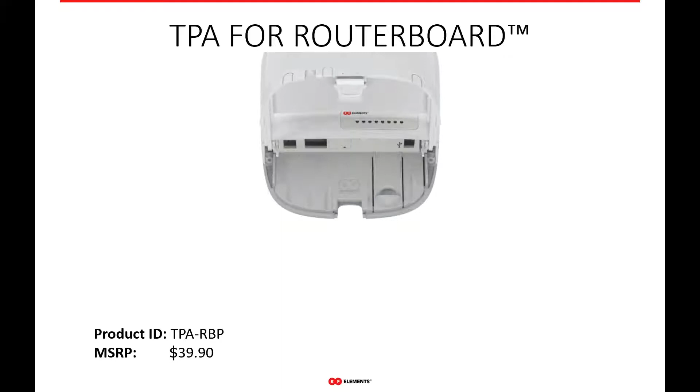So as where we left off on the TWISTPORT adapters for MikroTik. So the first adapter I believe you all saw was the TWISTPORT adapter plastic. Again, this is a plastic enclosure that allows you to put any of the 411, 711, 911, and the M11 series boards into the adapter and use them in our waveguide radios.

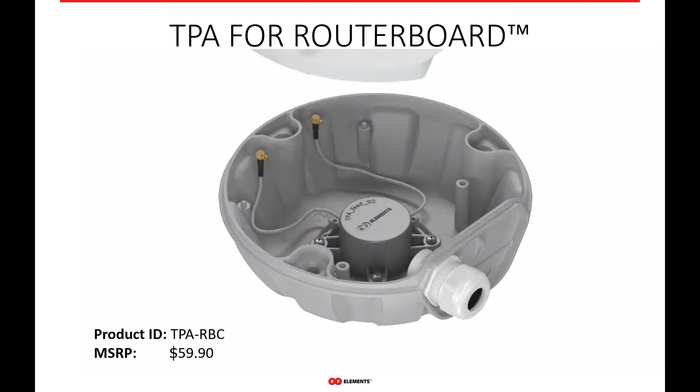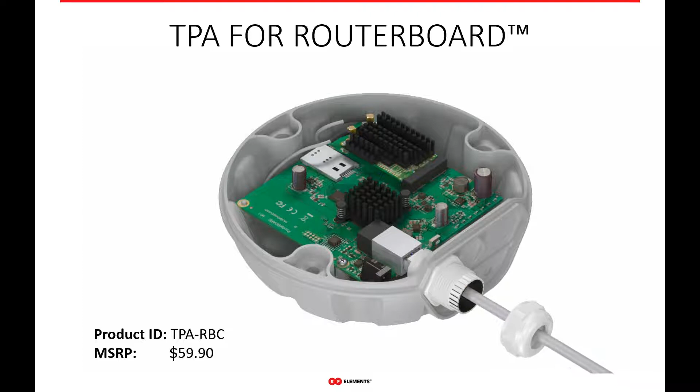The second adapter for ROUTERBOARD is our ROUTERBOARD cast. This is a full metal enclosure that gives you better EMI protection and is something probably better suited where you're operating in a more harsh environment. It has a full O-ring seal, and again, it's all metal enclosure. So again, this adapter works for all the same 911 type boards and M11 boards from MikroTik.

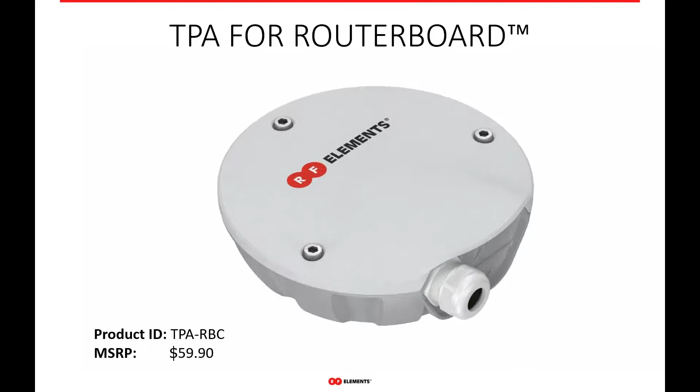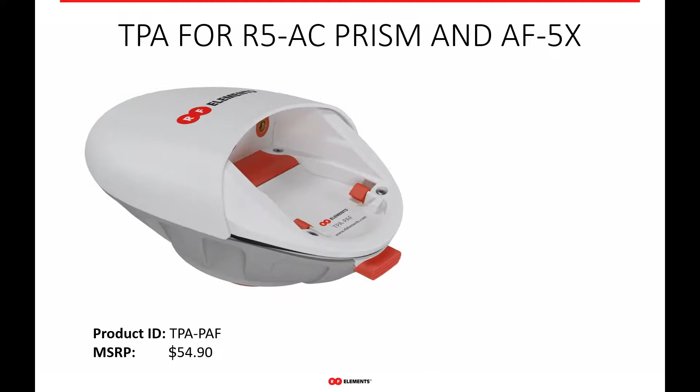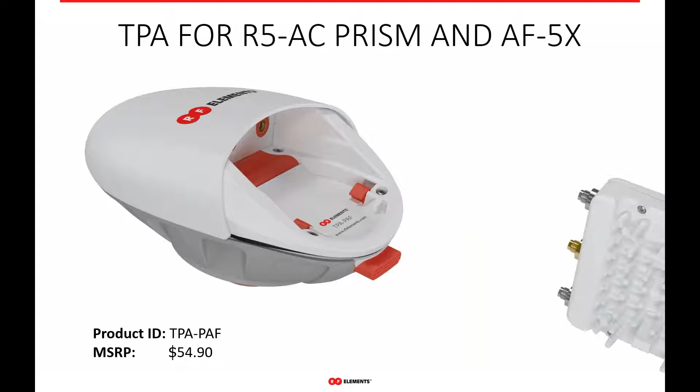If you're using the Rocket 5 Prism or the AirFiber 5X platform, this one adapter, the TWISTPORT adapter PAF, PAF stands for Prism AirFiber, again, will allow you to connect any of the Prism stations or the AirFibers with this one adapter into our TWISTPORT adapter.

This adapter has another new, very unique feature, and that's the GPS antenna integration. So if you lift the cover off of it, you have a very nice and safe place to put the GPS puck for the PRISM and the AirFiber radios. In a lot of installations and in a lot of different areas, birds and other things like to chew on the GPS cables when they're external. So this gives you a great place to hide it safely underneath the adapter, and therefore give you yet another great feature from RF Elements.

As far as compatibility goes, again, this one adapter works now for the new LTU Rocket. It works for the AirFiber 5X and the newer AirFiber 5X HD. It works for the original Rocket Prism 5AC and the Gen 2 Rocket 5AC. So again, one adapter for 5 different radio platforms.

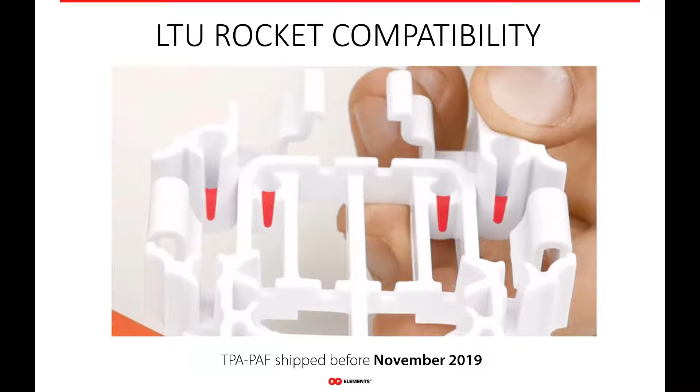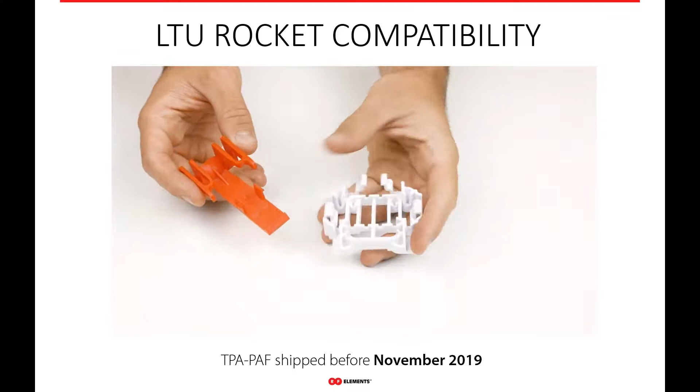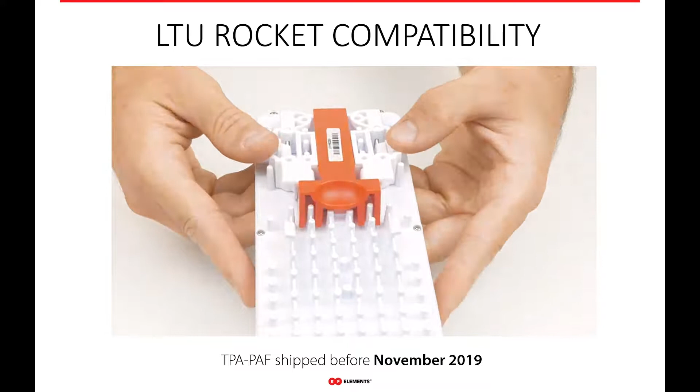Now, specifically on the LTU Rocket. So there was an issue with the Rocket where the adapter, the slide-in piece, didn't fit. And there's a very simple fix. If you have our older ones, you simply need to cut just a little bit of the plastic out in these specific regions, and then it will fit perfectly onto the LTU Rocket. All new PAF adapters should have this fix already built into it. So basically, if you have anything that's shipped before November of 2019, you'll have to do this simple little modification yourself. If it's shipped after that, it should work straight out of the box. So very simple fix if you have these radio systems.

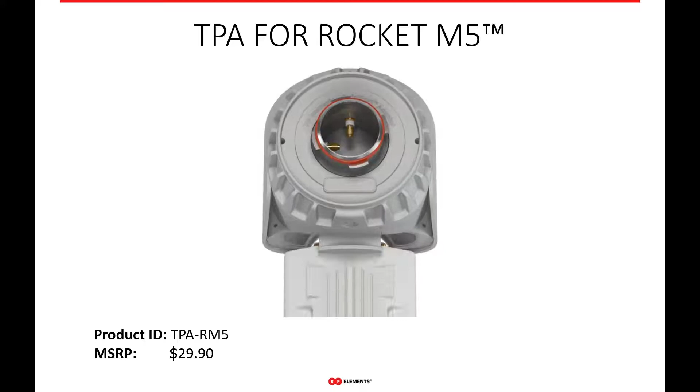If you're using some of the legacy Ubiquiti radios like the Rocket M5, we have a new updated adapter for that as well. So it's the RM5. These are, again, great radios that work very well with our horn antenna. So don't be worried if you have older radios. You don't need to upgrade necessarily to the newer radio platforms to enjoy the use of our horn antennas and

other antennas. The same can be said for the Rocket 5 AC, also known as the Rocket 5 AC Lite. So if you have that first generation of AC radio from Ubiquiti, we have an adapter that works for that radio as well. So a huge collection of adapters for Ubiquiti and a lot of support there.

Hello, everyone. Sorry, did you say something? Yeah, I think if you could go back a little bit, I think your audio was not clear for the last 20 seconds. Okay, so again, the last 2 radio platforms, I'll go back one more.

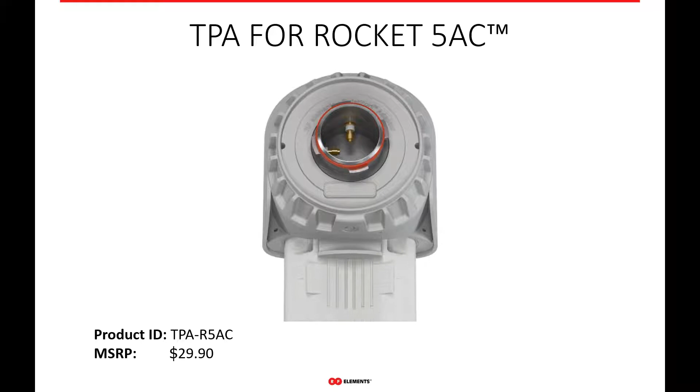So the Rocket M5 from Ubiquiti is also supported with our adapter. So if you have an older legacy radio system, you can use these adapters and still benefit from our antenna systems. And the same goes for the Rocket 5 AC. This is the first generation AC radio from Ubiquiti. It's also known as the Rocket 5 AC Lite. So if you're using that radio, again, we have an adapter that will allow you to use all of our TWISTPORT antennas for them.

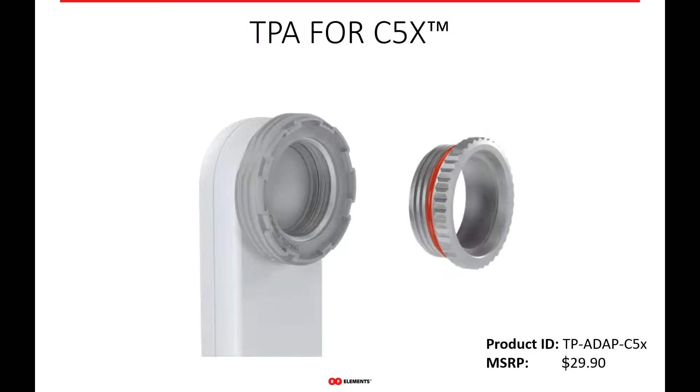And then finally, our newest adapter for the C5X from Mimosa. So again, this is another waveguide converter that converts their waveguide interface into ours, so you can utilize that radio with any of our TWISTPORT antenna systems. Another unique feature of the C5X adapter is the ability to adjust this from H and V to slant 45. So you connect it in one direction and you could use it in H and V. And then if you put that slider in where the arrow points to slant, you're now able to use slant polarization with our TWISTPORT antennas.

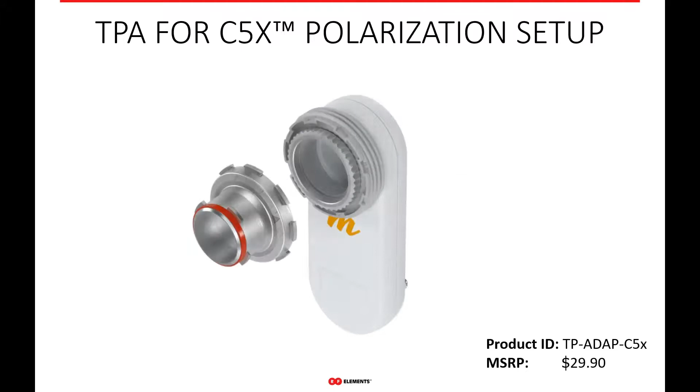One thing to note is that this slant 45 functionality only works with our symmetrical antenna series and will not work very well with our asymmetrical. So this is really for the symmetrical series only if you want to use slant 45.

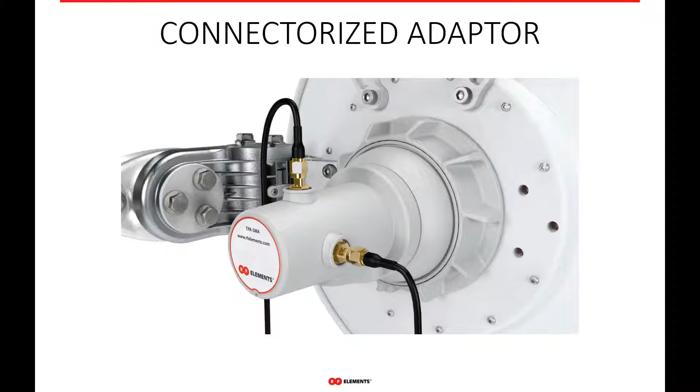Okay. And then finally, for all other 5 gigahertz radio systems out there, we have a connectorized TWISTPORT adapter with SMA connectors on there. So basically, if you're using a 5 gigahertz radio system where we do not have a specific TWISTPORT adapter for, this is the adapter you want to use. And typically, this is for larger form factor radio systems that are out there.

Like, for example, if you're using the 450i from Cambium, or the A5C from Mimosa, or the PTP 550 from Cambium. So any, again, large radio where we don't have a TWISTPORT adapter, this will give you SMA connectors that you can connect LMR from your larger form factor radio or unsupported 5 gigahertz radio and still utilize all of our TWISTPORT enabled antennas.

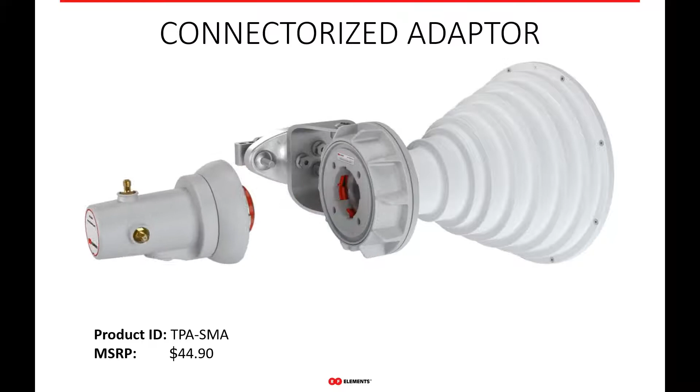We also have a TWISTPORT adapter cheat sheet for you. It's on our website, so if you want to cross-reference or look back to which adapter you want to use, you can go on our website and it will show you every adapter we have and the specific radio platforms in which they support. So this should make it quite simple for you if we went through it too fast and see which adapters work for which radio system.

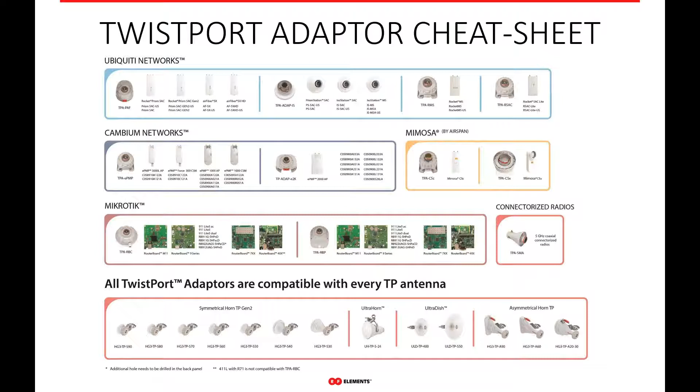So now we'll move on to the antenna portion of the presentation that completes all of the TWISTPORT adapter and compatibility questions that you may have, right? So the first antennas on our product map here will be the symmetrical horn antennas. Now these are the antennas that we offer with a symmetrical beam pattern, and we have everything from 30 to 90 degree symmetrical horns in 10-degree steps, so 30, 40, 50, 60, 70, 80, and 90 degrees wide. For those of you who haven't seen our product, this is what it looks like. Again, this is our symmetrical horn TWISTPORT series of antenna.

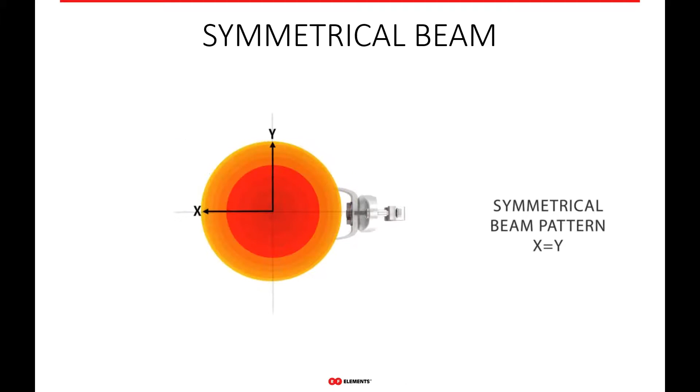So what makes the symmetrical horns unique, right? And basically, it's their symmetrical beam. So if you look at the azimuth and elevation cut, you can see that the beam is symmetrical in its shape. It's just as wide as it is tall, right? So that's why it's called a symmetrical beam. It's the shape of the beam that comes out of it.

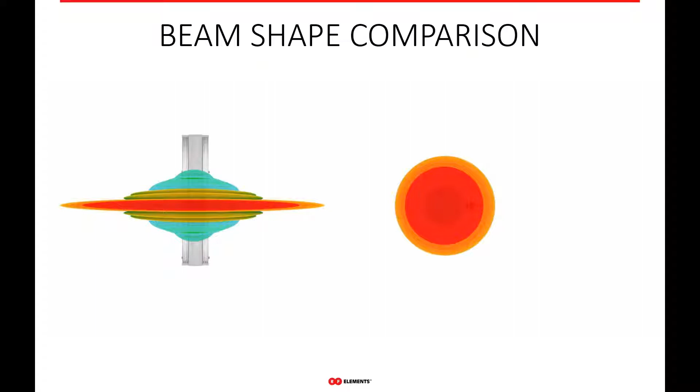If we want to compare it to your traditional sector, here again, you can see the big difference between the two antennas. First, you'll notice that the beam shape is different. Again, the one on the right is symmetrical and the other one is asymmetrical, but you also notice absolutely zero side lobes, right? So this is the great thing about our antennas.

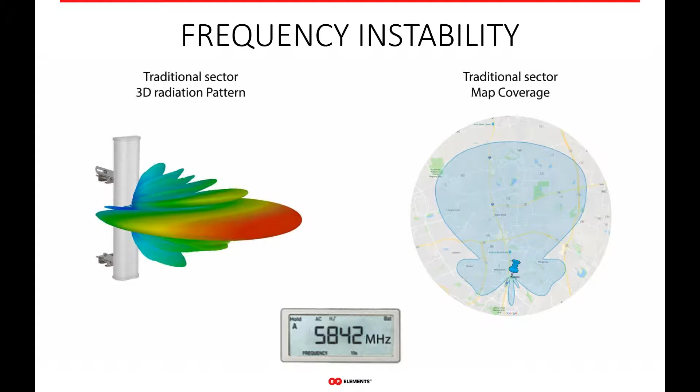This is probably the number one thing that affects WISPs. When you actually change frequencies and you have customers all of a sudden fall off that had good signal, people tend to attribute that to noise on the new channel that you went to. But typically as a WISP, you don't go to a new channel if you see noise there. So the channel is probably clear, and what's happening is the coverage pattern is changing, and now you're not getting the same signal intensity throughout your coverage area because of the dynamic change and the instability that these sectors have as you change frequencies.

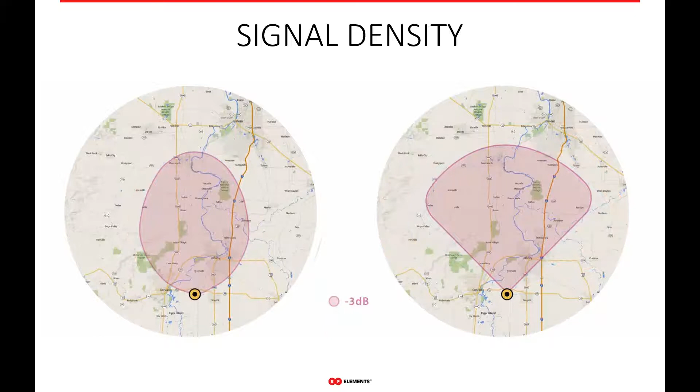If you look on the right of a traditional sector, the bleed off is much slower. So that means that your 90-degree sector is really more like possibly 180 degrees, because the signal drops off so slow, it still has a very high intensity signal outside of that spec antenna pattern. So it's very, very important to note that as well.

The symmetrical horn series of antennas, again, come in 7 different sizes, everything from 30 to 90 degrees in 10-degree steps. The important thing to notice here is the gain to beam angle relationship. So the more we focus the horn with, let's say, our 30-degree horn, you see it's basically 18.4 dBi of gain. If you look at the widest one we have in the symmetrical series, the 90-degree, you can see it's only 9.6 dBi of gain, right? So the wider you make it, the less focused it is, the less gain you have.

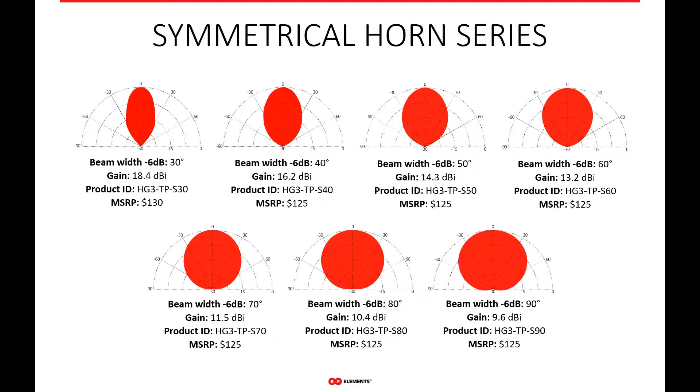And the reason it's important to understand this is because a lot of first-time users think, hey, I have a 90-degree sector, I'm just going to put up this 90-degree horn and expect the same difference. And you have to understand that this horn is anywhere from 8 to possibly 10 dBi less gain than the traditional sector that you just swapped out. So as long as you understand this relationship, you'll have a much better experience using the horn, because again, you need to know you can't compare a higher gain sector to a lower gain horn and expect the same results.

Very compact size of our antenna makes it very unique as well. Our typical symmetrical horns are roughly about a quarter or a third of the size of your traditional sector. So what this means is that you can get anywhere from 3 to 4 times the AP density in the same vertical space of one traditional sector. So this is very important when you're trying to build high density networks, when you have towers that maybe don't support so much weight or can't hold up so much wind load.

The symmetrical horn's compact size makes it a very unique and great feature for networks that might need to grow and scale up. So really the symmetrical horn series is a co-location miracle. It really is.

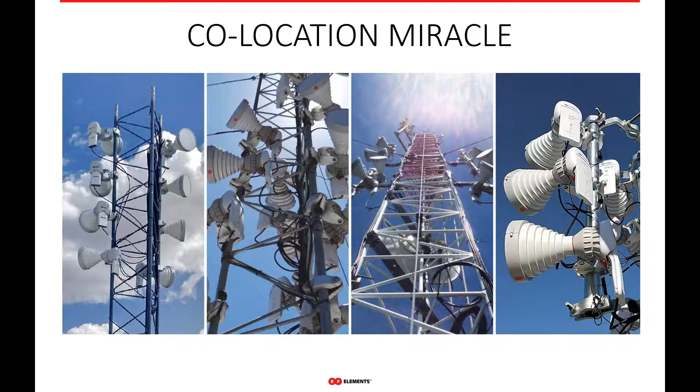And this co-location miracle is not just something you see on a spec sheet, right? It's really not just marketing fluff where we're just saying, hey, it works. These here are pictures of basically the standard of installs today. So you can see how you can co-locate tons of these horns on the same tower. You can co-locate them on the same mast, and you could really get this high density or massive scalability that we've been talking about for years now.

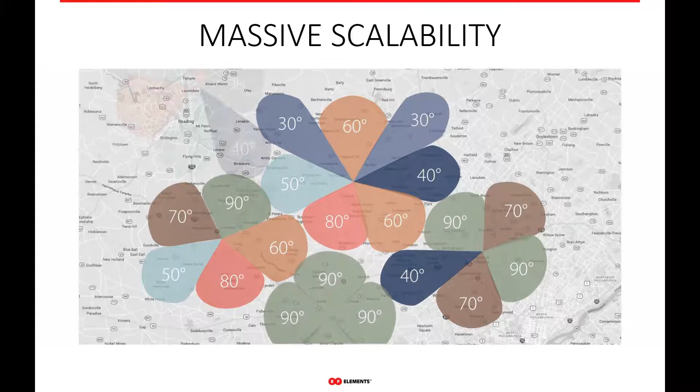So again, the use of all of our horns, not just the one type, but all of our horns together allow you to build very dense, very scalable networks, allow you to grow in areas where towers are facing each other. You could use much wider or lower gain horns in order to not be pointing at your other tower, and it really gives you the flexibility to put the coverage exactly where you need it to be. So all these things together create this massive scalability and meet the demand that you have for more clients and more throughput today.

So all of our antennas are built very well. We use non-corrosive metals like aluminum and stainless steel. We use UV resistant HDPE plastics and die-cast aluminum. So they're built very well with, again, all items that are non-corrosive for the harshest environments.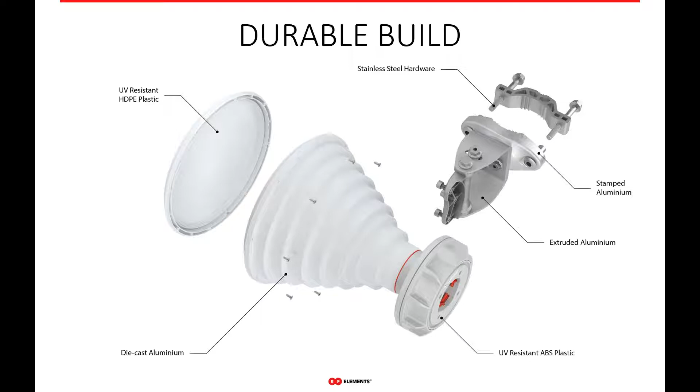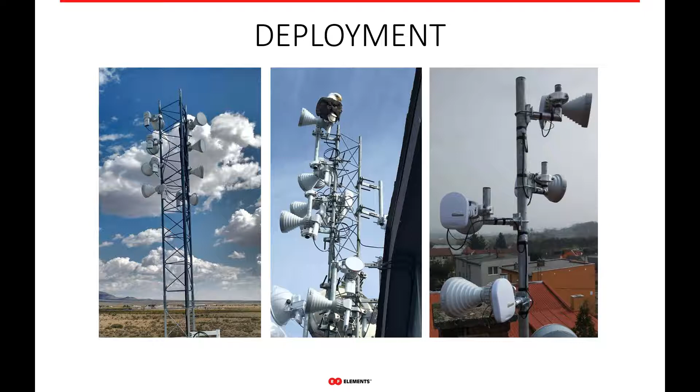Again, you can see more deployments that are out there, whether it's in the cold regions of Alaska and other areas, in the dry regions where there's deserts, or in dense cities. Our horns have been deployed all over the world. And again, you can see what your standard deployments look like for these really unique, high density, symmetrical horn antennas.

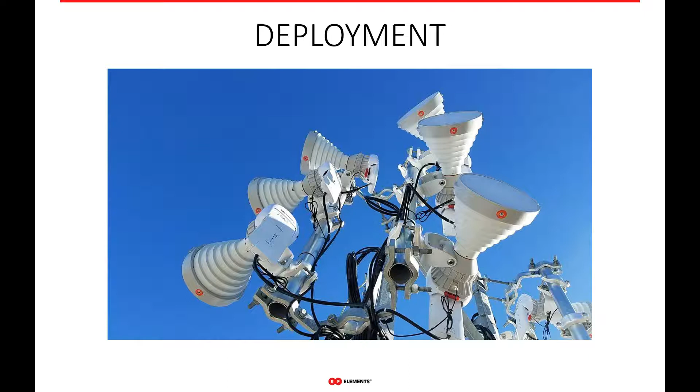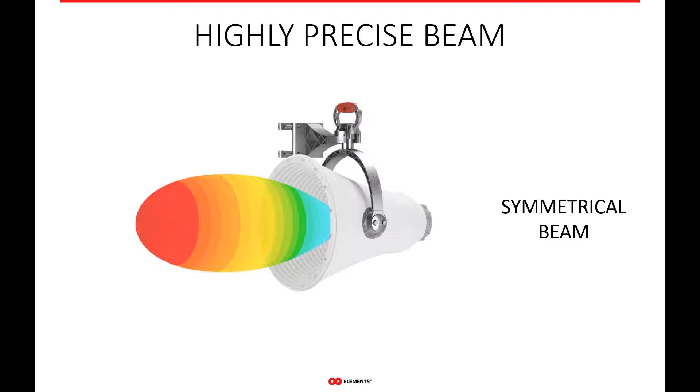So next, we'll move on to our Ultra Horn series. This is the next TWISTPORT antenna in our symmetrical beam series of antennas. The Ultra Horn is a much more narrow, higher gain horn. The Ultra Horn has a 15-degree wide beam angle, and it has 24 dBi of gain. So again, it's a highly precise beam. It's a symmetrical beam pattern like the other antennas that you have seen, just with more gain and more focus than the previous ones we spoke about.

The Ultra Horn also has the same frequency stability that you've seen in the previous antenna pattern. So as the antenna sweeps through the frequency spectrum, it doesn't change as much as you change frequency, and therefore you get the same stability and same usability as the previous ones.

Sorry, my animations here froze up.

The same can be said for zero side lobes on our Ultra Horns as well. The parabolic dish antennas that most people use for point-to-point systems have, again, huge side lobes that create issues and therefore minimize the amount of throughput that you can push through your radio system.

Hold on a second. Yep, sorry, one second.

Just give me a second here.

If we look at it in 3 dimensions, without the shroud, you can see how the shroud simply just squishes those side lobes forward and creates even more and changing side lobes for the front to back of the antenna. So really, shroud antennas change the radiation pattern. So if you buy your antenna based on the spec sheet from that antenna manufacturer, and then you put a shroud on it, that antenna pattern no longer exists, and therefore you really don't know what you're getting.

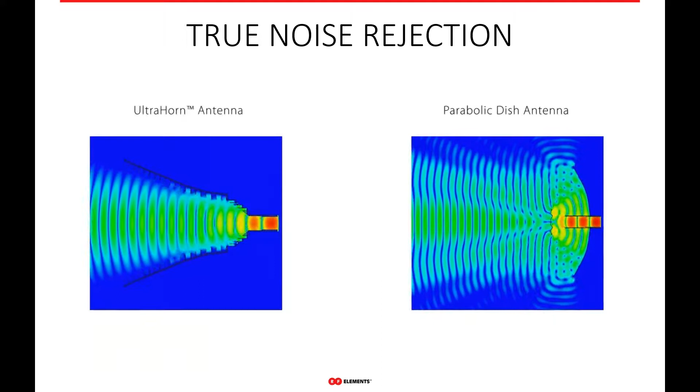So true noise rejection comes from, again, antennas that are built properly from the beginning and are designed to not have side lobes. So on the left, you can see our ultra horn point-to-point antenna, which has a 15-degree beam angle compared to a parabolic dish antenna on the right, which on the spec sheet has an 11-degree beam angle, which is supposed to be much more narrow than our ultra horn. But when you look at all the side lobes that are putting out from that parabolic dish antenna, you can see that it's actually much wider than the ultra horn. So really the absence of side lobes is what gives you this great noise rejection and noise immunity. So pay attention to your radiation diagrams from the manufacturers of your antennas.

Our ultra horn really has ultimate performance in all frequencies, in both polarities, across the entire usable spectrum. So typically you'll see parabolic dish antennas and you buy them because they have the highest gain. We'll say it's 29 dBi, right? Well, what you often don't know is that 29 dBi is usually at one specific frequency and sometimes in one of the 2 polarities, right?

So our ultra horn and all of our horn antennas for that matter have very flat gain across the entire spectrum. So if you're moving from the upper UNII-3 down to maybe a DFS channel, it's important to make sure that your antenna actually still has the same or close to the same gain as it had in the higher frequency regimes, right? So this is really important, and you typically don't see that with your traditional antenna systems out there.

The ultra horn also makes antenna alignment really easy, right? Because there are no side lobes at that point. So it's hard to get those false connections where you might have too high of a gain of a dish at too short of a distance, and therefore your side lobe connections look high intensity enough, and you think it's a good one. With the ultra horn, you're either in or out of main beam connection. There are no false positives with the ultra horn. So very, very important thing. And it's something great if your installers are perhaps very new to the industry. It should definitely help them.

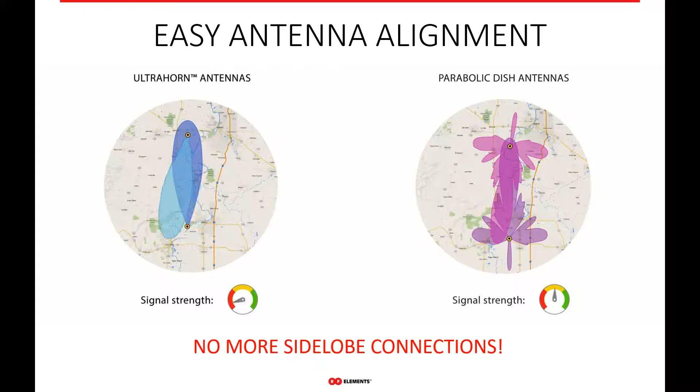We get the question a lot, is the ultra horn really a high performance antenna for point-to-point or point-to-multipoint? And really, the antenna doesn't care whether you use it for point-to-point or point-to-multipoint. What's important is, does the beam pattern fit your installation? If you have a high density of customers that are within an 8 or 10 or 15 degree beam pattern, then sure, you can use the ultra horn in point-to-multipoint, and a lot of WISPs are actually starting to use it when they need to increase their density, and a 30-degree horn is just too wide for the number of customers that they have.

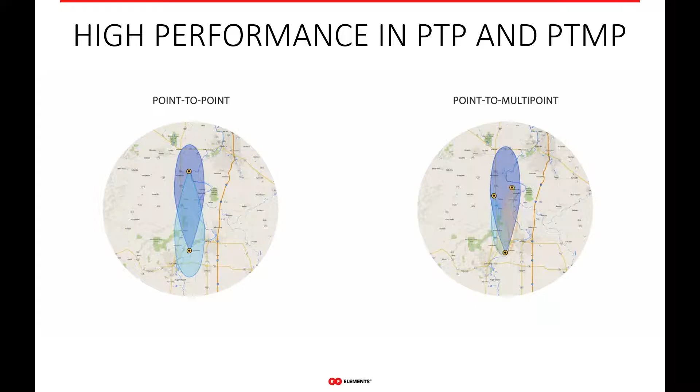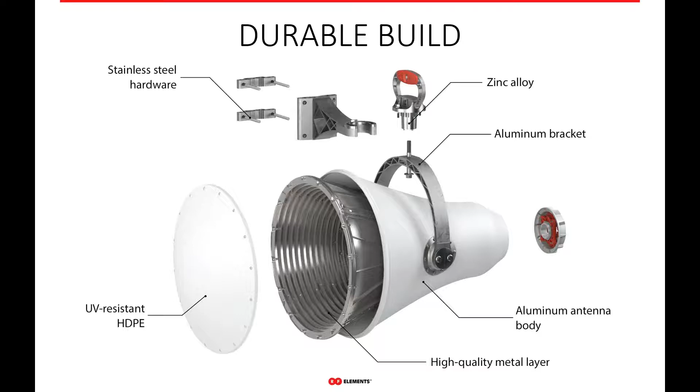Then they split that 30 into two 15s using Ultra Horn. So again, multiple uses for the Ultra Horn. It's not just a point-to-point antenna. Again, like our previous antenna platform we looked at, the symmetrical horn antennas, our Ultra Horn is also built very well for the harshest environments, again, using all non-corrosive metals and very UV resistant HDPE plastics.

So this previous install, they had this ePMP 1000 as a redundant backup for a licensed link. It was only to provide 100 megs of throughput, again, as backup to a licensed link. It was using previously a 30 dBi dish, right? And this 24 dBi horn fixed the problems they had for thermal fade.

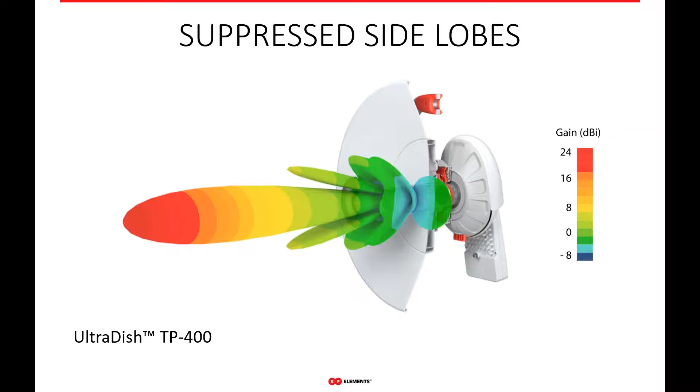So I just want to be clear so people understand that we're not saying our parabolic dish has zero side lobes. It has side lobes because it's inherent to that antenna platform, no matter who makes it, but we're able to suppress it and therefore give you some better noise immunity than possibly some other ones that are out there. One of the other focuses when we built the UltraDish was not just to suppress the side lobes as much as we could, but also to give you that stable gain.

So again, if you look at the gain performance across the entire spectrum of operation for our UltraDish 400 and our UltraDish 550, you will notice that the gain is fairly flat, and it's fairly flat in both polarities. So we don't have two gain plots for horizontal and vertical. We could use a single line because the gain is the same across the entire spectrum for both horizontal and vertical. So you don't see that high peak gain that you see with other competitors out there in one frequency and possibly only in one polarity.

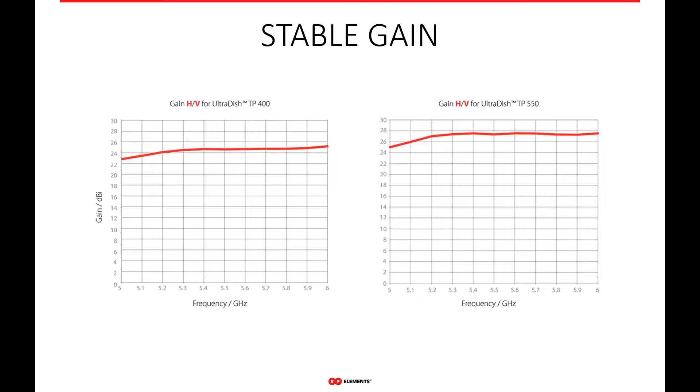So this is really important when you're using these dishes as CPEs in high noise areas. Traditionally, people like using patch panel sectors or patch panel antennas for high density deployments. And you can see with all their side lobes, they're able to see your other access points out there. With the UltraDish as a CPE, our suppressed side lobes make it a much better CPE antenna in very high noise environments and in very high density urban installs where you might have a lot of access points distributed throughout the city or on multiple microcells.

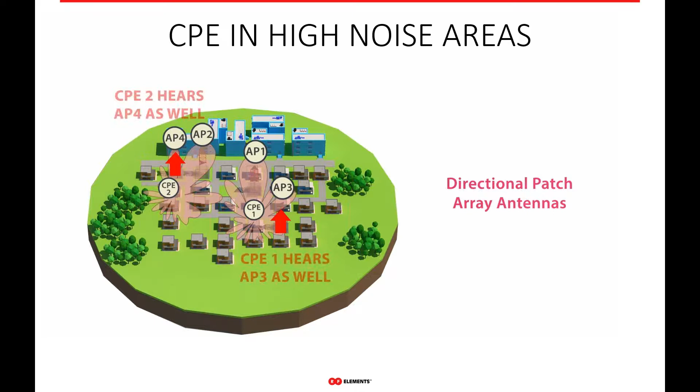So again, eliminating the side lobes or reducing them as much as possible in these high density, high noise areas. The UltraDish works very well for CPE or in point-to-point as well. Our UltraDish series also has a very innovative mount like most of our antennas. You only really require 2 bolts. You mount the mount onto it and then the antenna slides and locks into place.

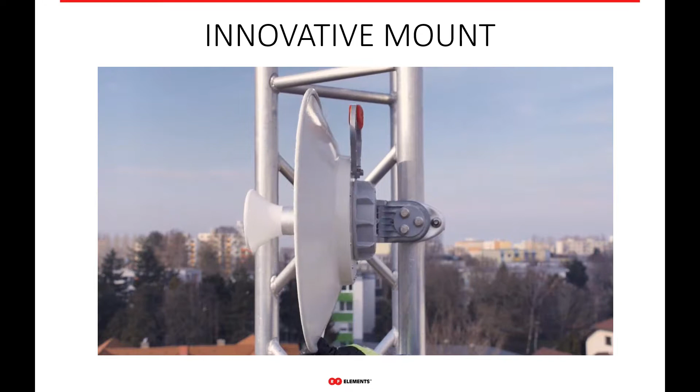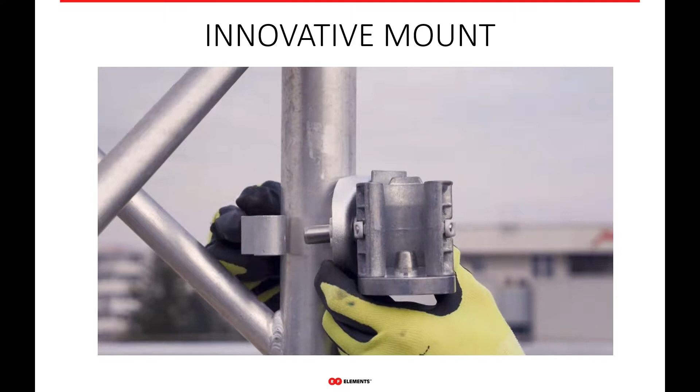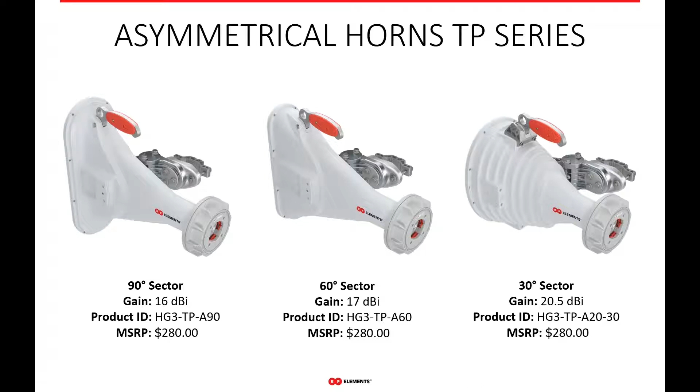So now we'll move on to our asymmetrical beam pattern antennas here with our newest asymmetrical horns. Again, 3 different varieties. We have a 60, a 90, and a 30 degree, and we'll talk more about that in a little bit more detail. So again, if you haven't seen our asymmetrical horn series, you will notice now that the wider antenna patterns have more gain because we've changed the beam pattern shape of these asymmetrical horns.

So the 90 degree asymmetrical horn now has 16 dBi of gain compared to our 9.5 dBi of gain of the symmetrical 90. The same for our 60 degree asymmetrical horn now has 17 dBi of gain compared to 13.5 of the symmetrical 60 degree horn. And then our 30 degree asymmetrical horn now has 20.5 dBi of gain compared to 18.5. So again, we were able to maximize gain, right?

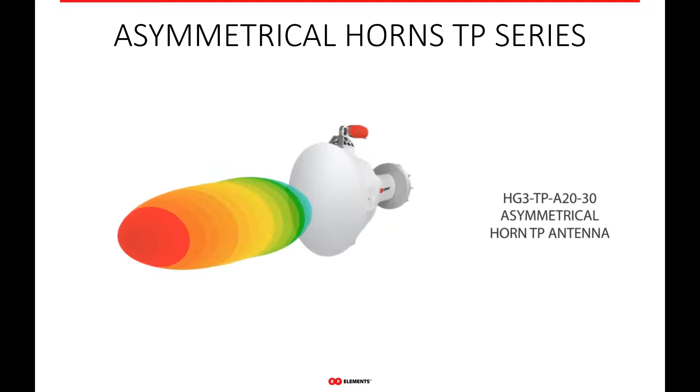So again, the asymmetrical pattern is talking about its shape. So you can see how this one is 30 degrees wide and 20 degrees tall. We also have a beam switch feature, which you can rotate the antenna to make it 20 degrees wide or 30 degrees tall. Our 60 degree asymmetrical is 60 degrees wide and 25 degrees tall. And the same for our asymmetrical 90, it's 90 degrees wide and 25 degrees tall. So more of a sector feel in the beam shape of the antenna with, again, absolutely 0 side lobes and all the great performance we've mentioned with all of our other antennas.

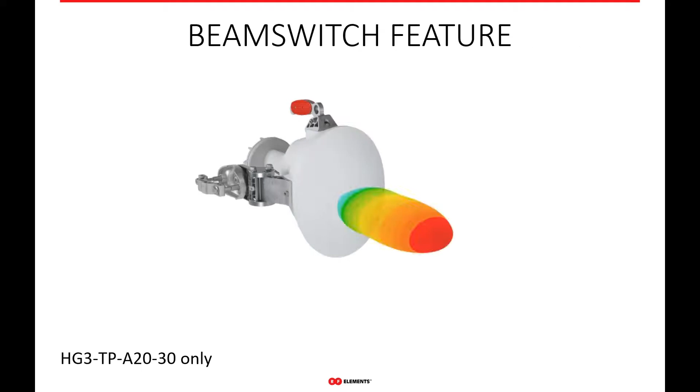This beam switch feature is actually quite cool. So by default, the 30 degree asymmetrical horn is again 30 degrees wide and 20 degrees tall. But you can rotate the antenna with the mounting system 90 degrees. And now you'll end up having a 20 degree wide and 30 degree tall beam pattern.

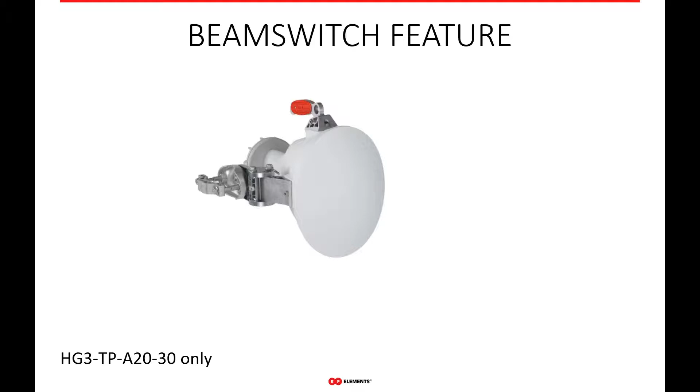So if you need more density, if 12 30 degree APs isn't enough, maybe you need 18 20 degree wide beams, you can use the beam switch feature on the same antenna and therefore maximize your density and really increase the amount of aggregate throughput on your tower. So pretty unique and very cool feature of the asymmetrical 2030 antenna.

You get a more perfect coverage pattern now, right? So again, you still get the small null zone, but you get more of the unique or the sector-like wider coverage at higher gain than you're used to. So again, for most of the lower density rural areas, these antennas work very well.

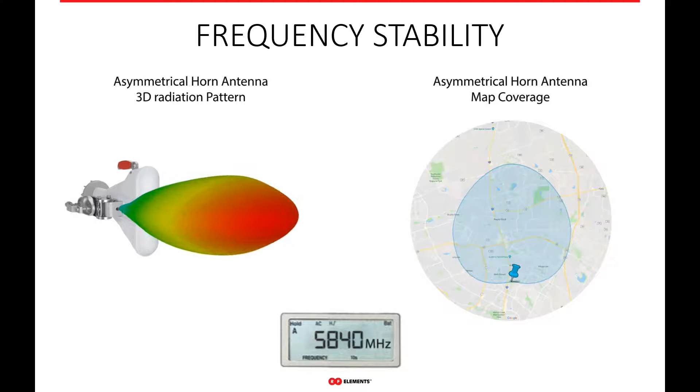Again, if we compare the Ultra Horn 60 to a patch array antenna, you can see there's no back radiation, there's absolutely zero side lobes, nothing but front-facing energy in a very precise and very uniform factor compared to your traditional sector. Again, you get that great frequency stability as you sweep through the entire spectrum. You can see that the coverage area doesn't change as much as traditional sectors do. So again, you'll have a much better user experience, and your customers will have a much better user experience as well.

Something that took a lot of time, and we spent a lot of time in trying to make sure, was that we actually balanced both the horizontal and vertical beams. If you look at a traditional sector, typically your horizontal and vertical beam do not match, right? So you might have one polarity much wider than the other, and typically they take the average of those two beams and tell you that you have a 90-degree sector, when really horizontal is 110 and maybe vertical is 70, and the average comes out to something like 90.

With our asymmetrical horns, we made sure that the vertical and horizontal perfectly overlapped, and therefore gave you the same coverage in both polarities, which is really important. And it's one of the reasons why you see all those MCS chain mismatches or the deltas between chains on your traditional sectors. With our asymmetrical horns, you will not see it like you do with traditional sectors. So a very important part of what RF Elements brings to the table when we design antennas.

So again, these asymmetrical horns are fantastic for rural deployments. This is now the answer for somebody who has a low user density of customers. You may need 360 degrees of coverage, but your business model really doesn't build out for 12 very narrow horns or something like that. So now you could use 4 90-degree asymmetrical horns or 6 60-degree asymmetrical horns to again address this lower density of users, and therefore still fit your budget.

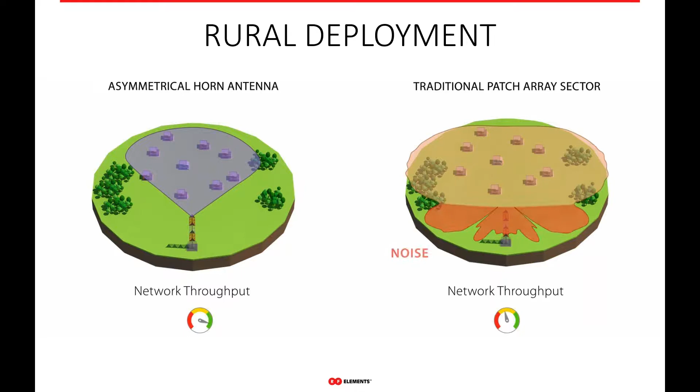And again, without side lobes, you're still bringing all that noise immunity to the rural area, because no matter how rural you are, noise will find you eventually. So if you're not seeing it now, I guarantee you will see it soon, and might as well build from the beginning with proper antennas and therefore not have to deal with it later. So again, this is the perfect coverage for rural areas.

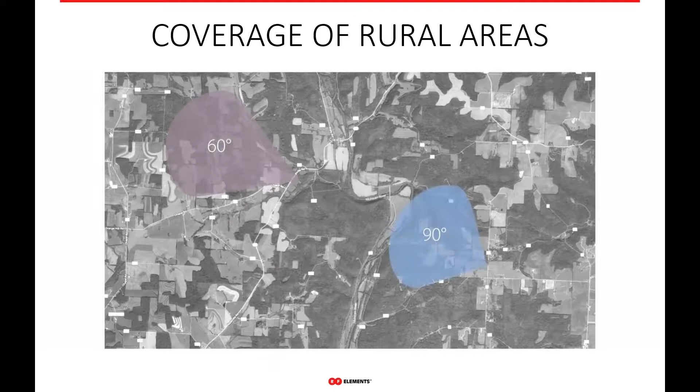We give you many different beam patterns. You have a 20, 30, a 60 and a 90, and you could also fill in with our symmetrical horns if you wish to still build out the coverage that you need based on where your customers are, and not send noise or hear noise from areas where you don't want to hear from. Again, like all of our antennas, we use all corrosion-free materials, metals, and plastics, so built very well for the harshest environments.

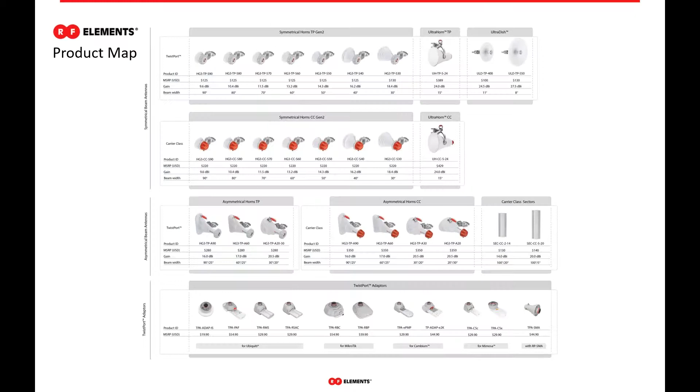So now we'll talk about our symmetrical horn series. This is the carrier class version of the symmetrical horns. Again, we won't go into great detail because the performance of the carrier class symmetrical horns are identical to what you saw with the TWISTPORT version. The only difference is that they have N connectors built into them. So why would you want to use these over the TWISTPORT version? Again, we spoke about earlier, maybe the radio platform that you're using isn't supported by a TWISTPORT.

So there's no reason to buy a TWISTPORT antenna and then the connectorized TWISTPORT adapter if you know you're only going to use, let's say, the A5C from Mimosa, or the 450i series from Cambium, or any other radio manufacturer out there. This is convenient for you. It has N connectors built into it, so you get all the same antennas, all the same performance, just with N connectors built in. The same thing for our asymmetrical horn that we just recently spoke about.

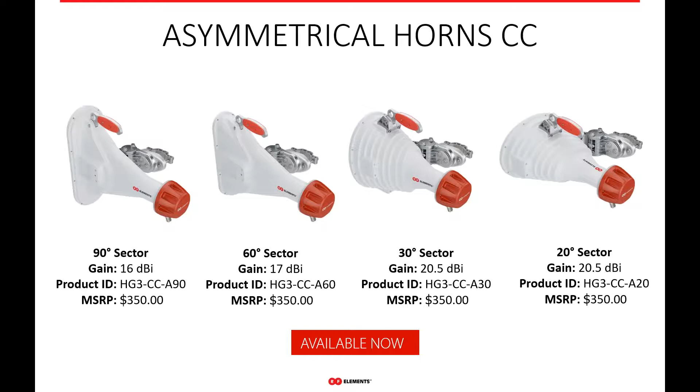So again, if you're using any of those large form factor radios, there's no need to get the TWISTPORT horn and then the TWISTPORT adapter. Just buy the antenna with the N connectors built in, and then you won't have to worry about that second SKU. We also support that in the Ultra horn as well. So we have the carrier class series of Ultra horn. Again, if you're using the PTP 550 from Cambium, or the B5C as point-to-point from Mimosa, the carrier class series of the Ultra horn would be ideal for you to not have to worry about another adapter.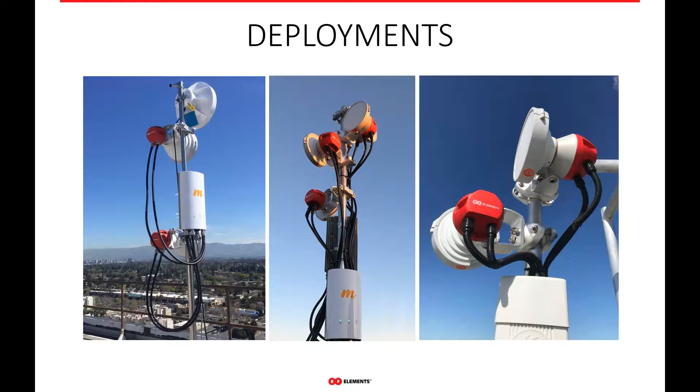So again, just some deployments out there. You can see in the early days on the right, before we had the TWISTPORT version of the EPMP 2000 radio, people used the carrier class because that was an unsupported platform at the time. Here you can see people using the carrier class horns with Mimosa, extremely popular antenna system for Mimosa these days. Just use your LMR cable to the carrier class series of our horns and you're good to go.

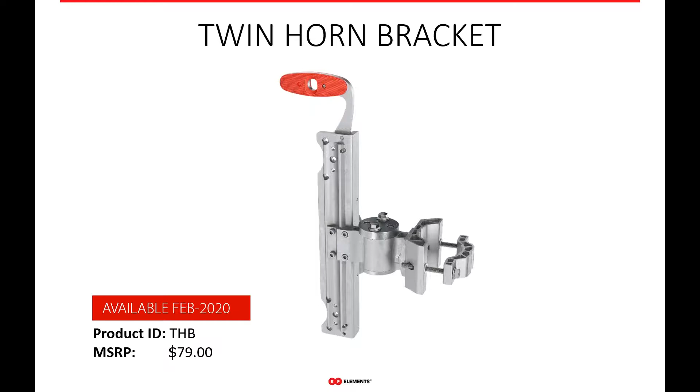A new product that we have coming out now is our twin horn bracket. This twin horn bracket was supposed to be available in February, but with everything going on now in China and around the world, some things are delayed in production. But the twin horn bracket is something you will see in the near future. It makes for simple alignment of two horns. Very simple concept. The twin horn bracket currently works only with our symmetrical series of antennas, and it has integrated radio mounts for the A5C from Mimosa and the EPMP 3000 from Cambium.

So if you want to do 4x4, this makes it really easy for you to not have to worry about independently adjusting two of the horns with the same coverage area. So this makes it easy to integrate the symmetrical series of horn antennas with either the EPMP 3000 from Cambium or the A5C from Mimosa at this time.

So finally, now we'll move into the last antenna in our series, which is our carrier class sector. Our sector carrier class is our legacy antenna system that we've had for a while. This is still a patch array sector. We have two different variants at the moment. We have the sector carrier class for 2.4 gigahertz, and it's 14 dBi of gain. And then we have a 5 gigahertz version that's 20 dBi of gain.

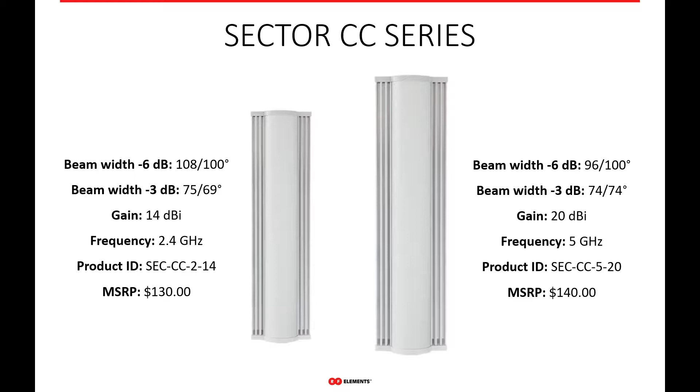So our... looks like the animation here, hold on.

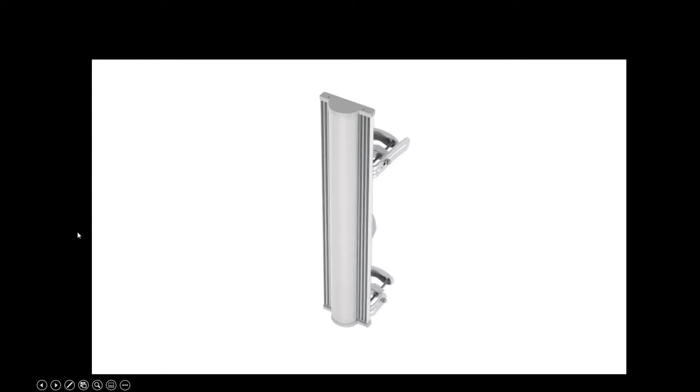So our carrier class version, or our sector carrier class, has a back shield built into the antenna. So this is a very unique shield. It's not a third-party add-on. It's frequency selective surfaces that allow us to attenuate a lot of the back radiation and therefore also help us balance the beams in both horizontal and vertical.

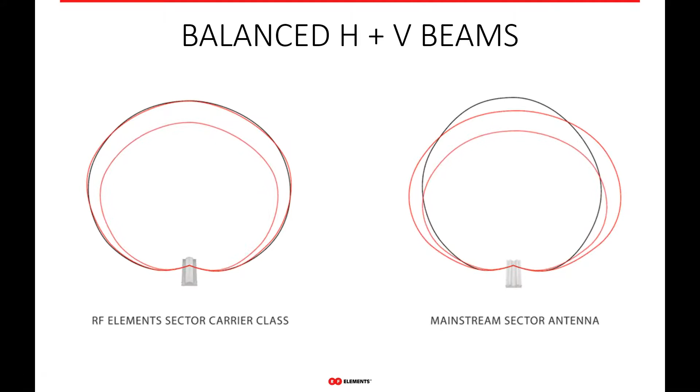Again, the back of the antenna has the kind of universal slip and lock into place adapter. So if you're using Ubiquiti radios and some Cambium radios, you can just click it and lock in place. You also have the pigtail cover to protect the pigtails that are built in there. So if you have the need for a patch array sector, we have both a 2.4 and a 5 gigahertz version available for those deployments.

Oh, the slides are messing up again. I apologize.

So at RF Elements, we're really setting a new standard for networks. We're creating antennas, our horn antennas with zero side lobes and great noise immunity. Our TWISTPORT ecosystem allows for a more efficient transmission medium from the radio, therefore less loss to your antenna. And therefore we give you the ability for massive scalability on your networks to really build them out.

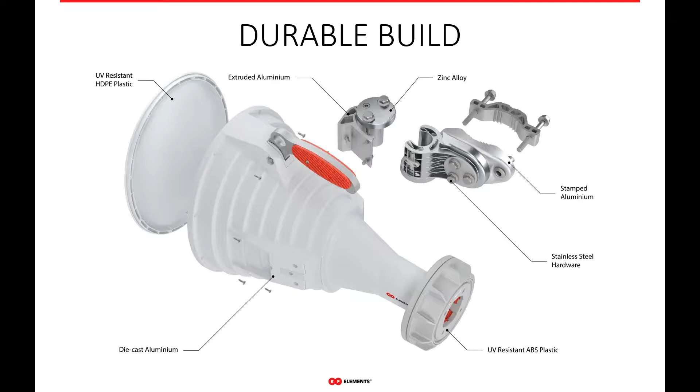Again, to recap, all of our antennas are built from corrosion resistant materials, aluminum, stainless steel, zinc, and UV rated plastics. One important thing to note is that our stainless steel hardware, like any stainless steel hardware, requires the use of anti-seize lubricant. So if you use our antennas, please use anti-seize on all the bolts to mitigate the galling that happens with stainless steel.

Right here as we get to the end, I apologize for this as well. Hold on. Let's try this again here. Sorry.

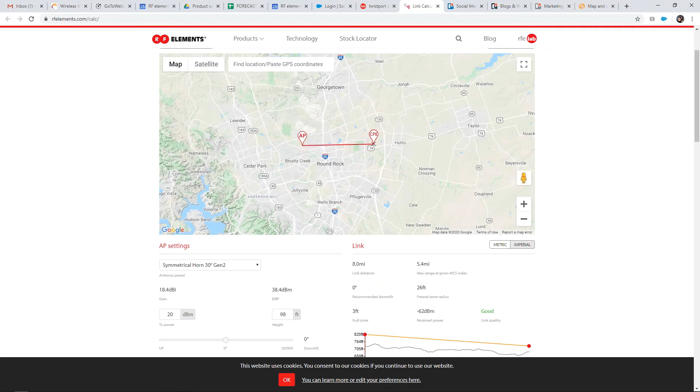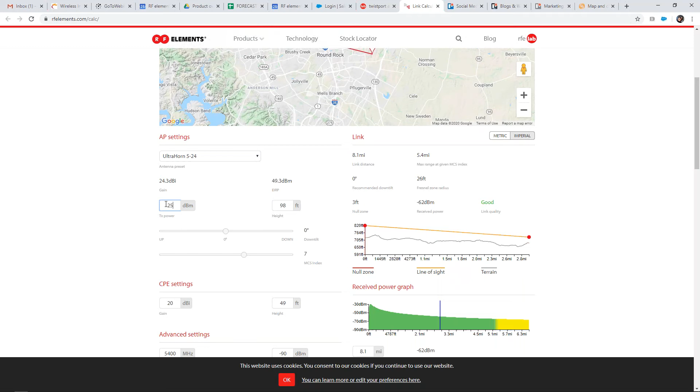So this is our link calculator. Can you see it come up? Yes. So I can just give you a quick demo here, right? So you can actually drop the pins and put them wherever your link is. Here, from the drop down, you pick whichever antenna it is that you want to do the link for or you want to use. Here is where you adjust the TX power that you put into the radio, right? So whether it's 20, 15, or potentially 25 dBm of TX power, you drop that into the calculator. Here you can adjust the down tilt to see how much down tilt you might need or you could afford.

Here is the slider for your radio platform. So you have to know which radio you're using. If it's a PRISM or ePMP 3000, it supports up to MCS 9. If it's AirFiber 5, you set it to MCS 10, which is the maximum rate. And then finally here, to answer his specific question, here's the CPE setting. So all we need to know is the gain. So if he's using, let's say our ULTRADISH 400, he would put 24 dBi of gain there. If he's using the PowerBeam or the Force 300 from Cambium, I believe that's roughly 25 dBi of gain.

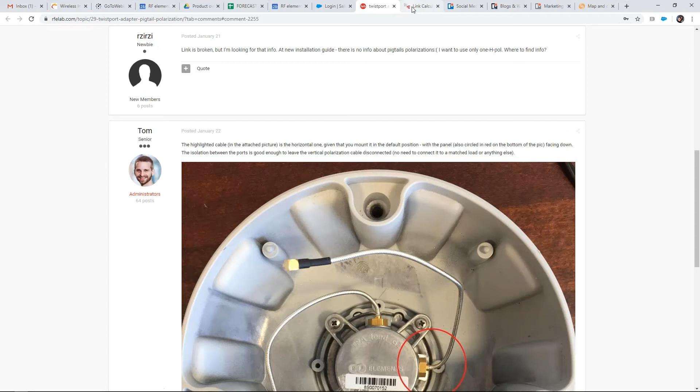So simply just put the gain of the CPE there, and then it will adjust everything for you based on those settings. So I think that should answer it. Yeah, so if somebody's saying Cambium is 27, again, you would just put 27 dBi of gain here. Oh, I lost my calc page here. It's also in Spanish as well. So if you click the Español key here, it will translate everything for you. So I think that should answer it. Also, we have some tutorials on how to use the point-to-point and point-to-multipoint function in Spanish. So you can go ahead and watch these two videos. It's probably better than me explaining it in English.